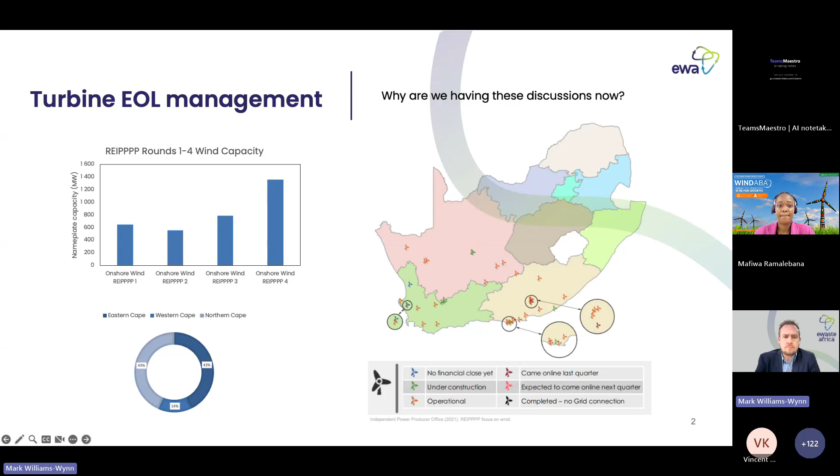The one thing I did want to focus on is PV. So PV, 5 years ago, everyone said, 'Oh, it's a future problem, we don't have to worry about it now.' And in 2023, we built a small plant just to start testing out how we can recycle these PV modules.

Within a few months, it was operating at full capacity. And I think in just this year alone, probably in South Africa, there's probably over 2,000 tons of solar panels that have been recycled. So that's how quickly the market builds up and the demand arises.

So I think this is why I'm very happy that this conversation is happening, just from a South African perspective in terms of protecting the environment, making sure that renewable energy stays as green as physically possible.

I think most people on this call would have more idea about the different components of a wind turbine than I do. So this is what you probably think about when you think about a wind turbine - these are the different components and different parts. From a recycler's perspective, this is what we would see.

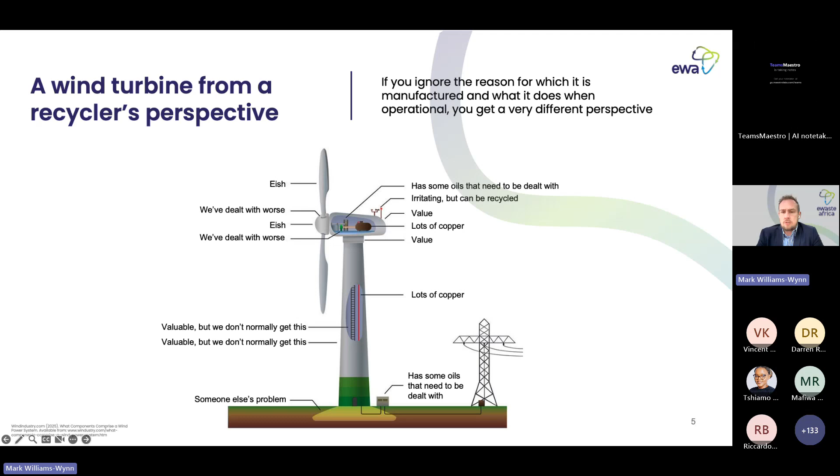What I want to focus on is, okay, well, what do we do with these wind turbines? So as I mentioned, the landfill of wind turbines is banned in South Africa.

So we have to find other solutions, and that's where your recycling comes into play, because by recycling, I'm actually referring to recycling and moving up on the waste hierarchy.

I'll show you what is meant by the waste hierarchy in the next slide. But it's finding ways to reuse the materials rather than just dumping them into landfill, where they will sit indefinitely, because they're not going to break down over a long period of time.

But if you look holistically at a wind turbine, and you look at what's called a life cycle analysis of a wind turbine, about 89% of the, okay, we're just focusing on the carbon footprint, not on all the other environmental impacts.

89% of the carbon footprint of a wind turbine is generated in the manufacturing process. There's a small amount in operations and maintenance and installation, but the vast majority is in the manufacturing process.

And so what that means is, if you are taking it and you're just disposing of it, you are essentially wasting all of that manufacturing impact that you've had on the environment. And so it's important to start looking at circular principles to intensify the use of the resources.

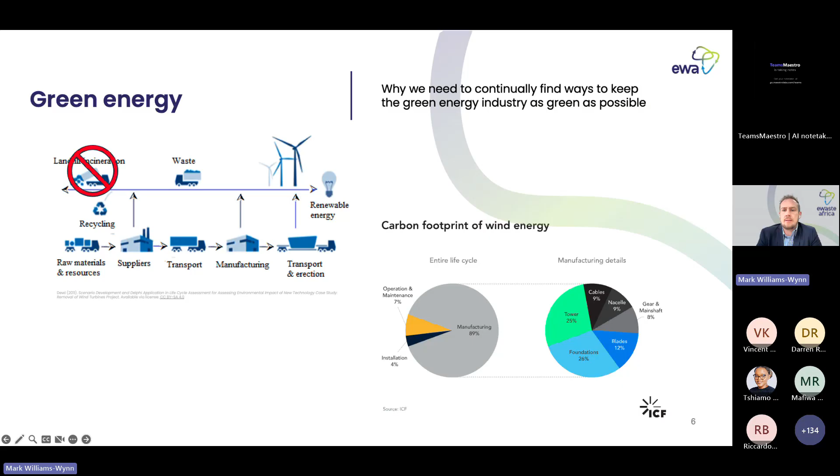Recycling is kind of undoing that manufacturing process, or to use a non-English word, unmanufacturing it, and all those inputs in terms of energy usage, chemicals, etc., are wasted because you have to redo it again for whatever you would reuse that material for.

So the waste hierarchy, it's actually a lot more complex, and there are a lot more levels than this. But I've simplified it in terms of what it could look like for wind turbine blades in South Africa.

So usually the lowest level of the waste hierarchy is disposal, but because it's banned from landfill in South Africa, the lowest level in South Africa would now be recovery of energy.

That is putting the wind turbine blades into some sort of pyrolysis or process where you can recover oils from the resins, or else using them in co-processing in cement kilns, etc.

But so the whole idea behind this waste hierarchy is the higher up you go, the more preferable it is.

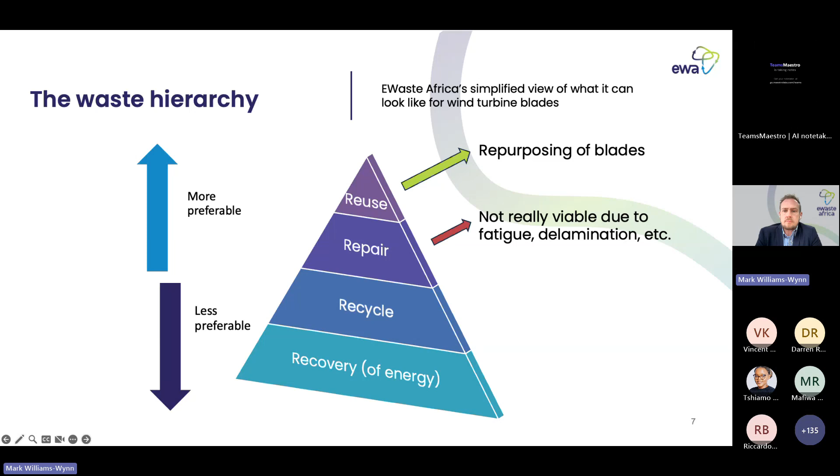If you're looking at using these blades and parts from wind turbines, the ideal way is reuse, where you're repurposing the blades for other aspects. I think BladeMade will take us through this in more detail later. Essentially, it's looking at things like using those blades for what's being done in Europe - bike shelters, bridges, kids' playgrounds, noise dampeners on highways, and protective sidings for highways.

I even saw recently there's a use of these wind turbine blades to stop desertification in China. I think South Africa is uniquely positioned for this, because sure, these are cool uses of wind turbine blades, but there's limited amounts that you can actually use them.

Whereas in South Africa, we've got a huge crisis in terms of housing for people. It's terrible seeing the number of shacks that are built every day, and there's an opportunity to make use of this material, which is going to have a lengthy time span. At the end of the day, it's mostly fiberglass, which can quite easily be repaired if there is a crack, in terms of using it for a roofing for a house or something like that.

Obviously, it can't be repaired as a wind turbine blade because of the intense forces that it endures when it is on the turbine. But in terms of using it to build houses, to build RDP houses, as a roofing structure, there's almost endless possibility in South Africa.

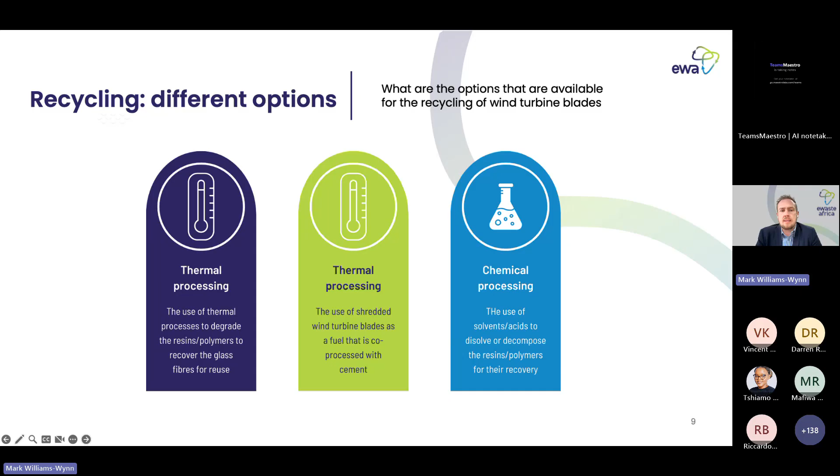And then the third option is chemical processing - using solvents or acids to dissolve and decompose the resins or the polymers so that they can be recovered, and also the glass fibers can sometimes be recovered.

For thermal processing, the first step is you need to shred the blade. So obviously, if you've got a 100-meter long blade, that has to be cut up into pieces, and hopefully that's something that DFFE can guide us on in terms of how we can cut them on site such that they can be transported more easily. Then they have to be cut down to a smaller size before they're shredded, and then moved into the pyrolysis unit. Pyrolysis is basically heating of the materials to a high temperature without the presence of oxygen.

If you add oxygen, it burns. But if you don't add oxygen, what happens is your polymers degrade and they form what is called pyrolysis oils. Those can be recovered and used either to fuel the process to provide that temperature to do the degradation, or else they can be sold as fuels elsewhere. So you have the pyrolysis oils come off the top of the process, and off the bottom of the process you get a char, and then sometimes you can recover those glass fibers.

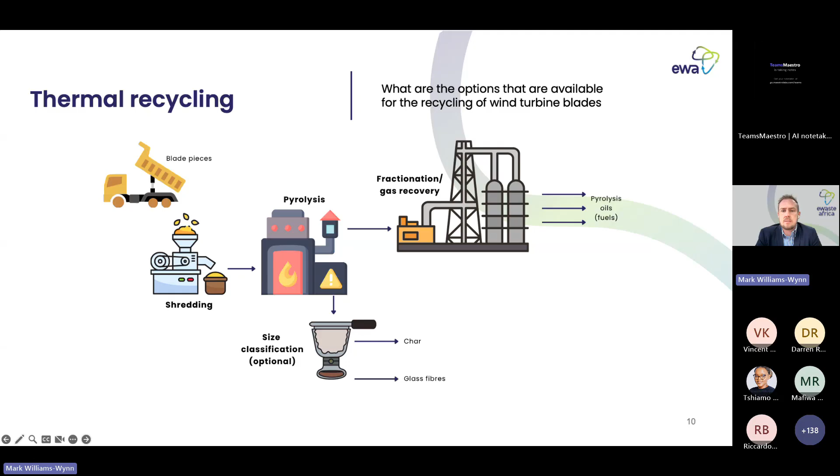Co-processing is very similar, but it just replaces the pyrolysis unit with a cement kiln. You do produce CO2 in that process, and then your cement clinker is where the glass fibers end up. Interestingly, Wind Europe has promoted this as the best solution for end-of-life management of wind turbine blades, because 100% of the material ends up in the cement. Since cement is used on a large scale and there are many cement kilns across the world, it's something that can be deployed immediately without needing specialized processes.

The last process is chemical processing, and the aim of this is to recover or separate your polymers from your glass fibers. Sometimes the glass fibers can be reused, but other times they can't, and a lot of it depends on how the blades are shredded and what the demands are for that glass. So maybe it can't be reused to make new wind turbine blades, but it could be used for other glass fiber products.

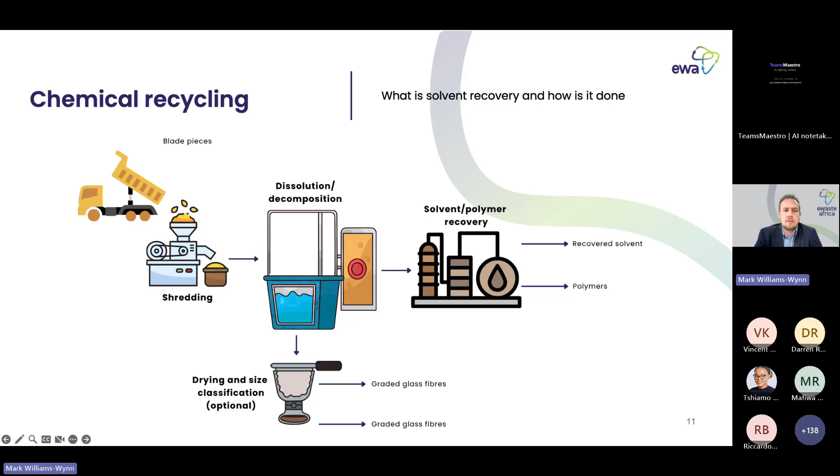In this dissolution or decomposition reactor, there are a number of processes internationally where either you add a solvent which dissolves the polymer, or you add an acid which breaks it down in a different manner. Then you have to go through a solvent recovery process, or some sort of recovery process, to recover that polymer and the solvent for reuse at a later point. You can also look at drying and size classification of the glass fibers if you want to reuse them in very specific applications.

So lastly, just some considerations I've mentioned already, but to reiterate: on-site processing in terms of cutting down the wind turbine blades to size. The big challenge with that is obviously the glass fibers—if you're cutting, you're releasing particles which could be carcinogenic, so it has to be carefully monitored and controlled. But from a waste management perspective, it doesn't make sense to transport these blades as large 100-meter-long abnormal loads when you can cut them into smaller sizes. This is something that may need changes to legislation slightly to enable that.

And I think another important aspect, particularly around EPR requirements, is clarity on the battery limits—what is considered e-waste, which are the hazardous components, et cetera. But I think there are great advantages with...

Considering the end of life of wind turbines, there is great potential for job creation. And then there's also, as I mentioned, the use of the blades for concepts such as RDP housing, which is immense in South Africa, and I think it's something we need to look at closely to see how we can align with government in terms of providing those roofs and materials for building RDP houses.

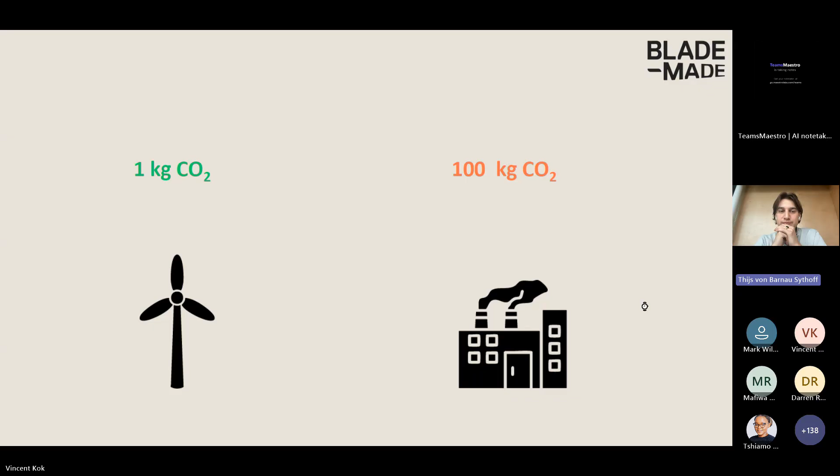But next slide please - at some point we've overlooked a few things. What we've overlooked is the material intensity. That was really nice, what Mark also illustrated - 87% of the CO2 comes from the manufacturing of the turbine. Because once it's there, it's very sustainable, but it's very high in material intensity. And we've never really thought about what to do with the turbines once they have to be decommissioned.

Please, next slide. So what are the metrics on this blade waste? Mark already explained a lot very nicely, the difference between the different components, so I'll just leave that be. So you now know that indeed blades are a pain point.

I've been presenting this slide for a while, and there's a few things interesting - one is 600 tons in 2025. I must say a lot of this is from a European perspective - we're a Dutch company, I'll come to that in a second. So a lot of it is on a European perspective, but I think it's really nice for you also from this South African perspective, where I believe, if I have the metrics right, most of your parks are now on half-life. So you actually have the time to avoid some issues that we in Europe have now.

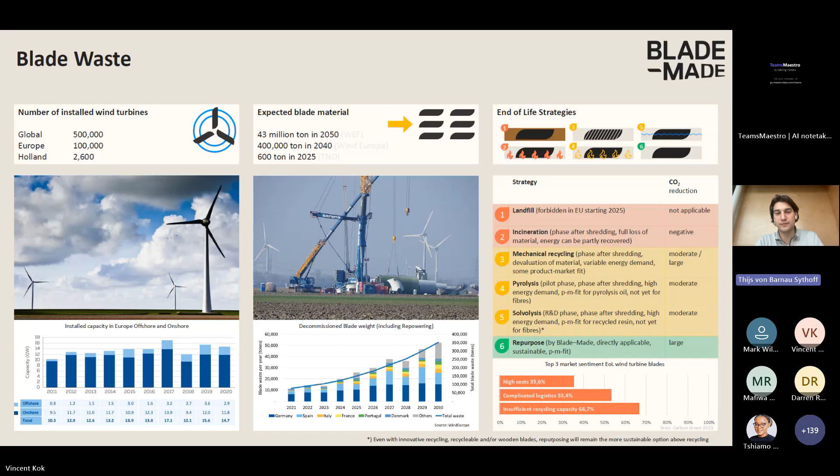Then another thing I'd like to talk about is circularity. I've visited a lot of events in the wind industry, like the Big Wind Europe fair, and also here in the Netherlands there's a lot of events where we talk about sustainability in the sector. And then I hear a lot the text: yes, circularity, but we're also already working on circularity.

We're working on, for example, recyclable blades, and that is a very good and very important development, but that's only preventing the problem in the future. We have a current problem that comes from blades that have been produced in a way that are not recyclable. Also, recyclable blades at the moment are only 27% recyclable - that's a good footnote. So just saying yes, we're already investing in circularity in our new products, does not mean the existing issue will just magically solve itself. It's not going to magically solve this 400,000 tons and 43 million tons that is projected at the moment. That is still coming.

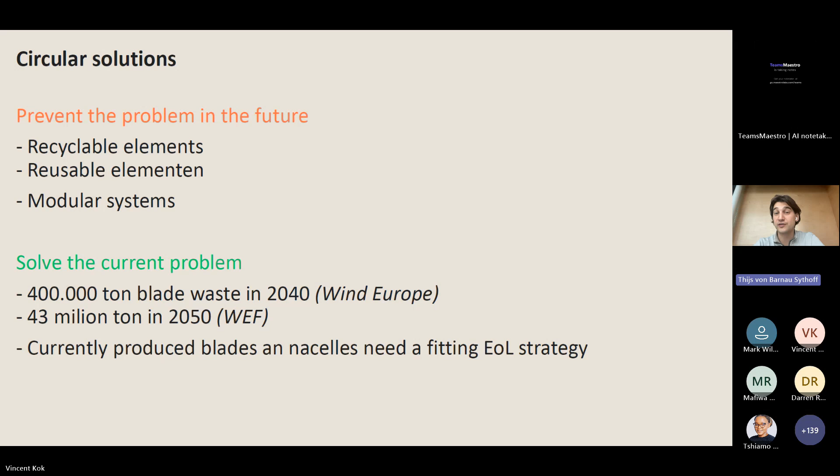So we need good end-of-life strategies for this. And if I talk about end-of-life strategies, I talk about reuse, repurpose, and recycle, and yes, in that specific order. Why in that specific order?

It's in Dutch, but the most important words are in English: the R ladder of circularity. It goes all the way from refuse to recover, and the higher you are in this hierarchy, the more circular and the better it is for the environment, and the more quality you have in reusing your materials.

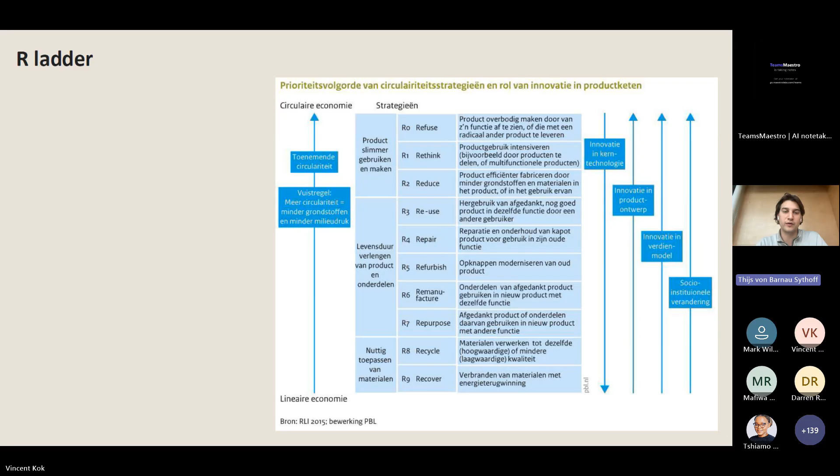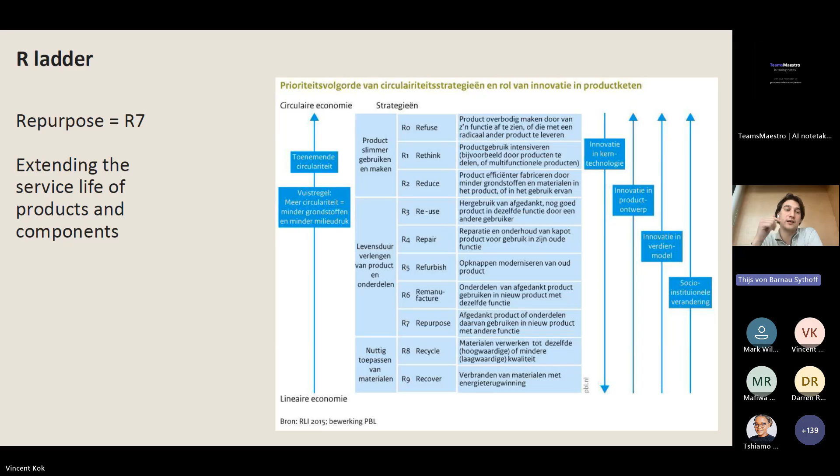So reuse, that's the first. Reuse is R3, and it's in the category of extending the service life of products and components. Repurpose is quite below that, as R7, but it's still in the category of extending service life of products and components. Recycling, although it's only one beneath repurposing, is a completely different category - it's just effective use of materials.

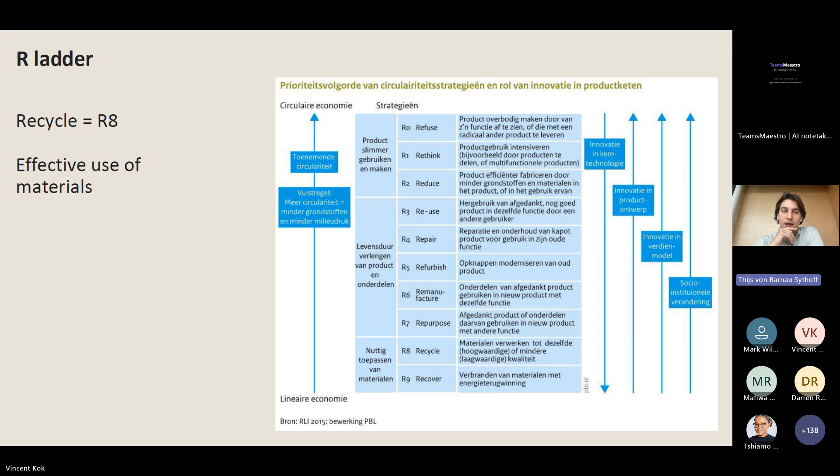So again: reuse, repurpose, recycle. Reuse is the best, but it just doesn't happen as much, because reusing a wind turbine blade literally just means it comes down from the turbine, you decide this is still good to go, and you sell it to another wind park owner, and it will have another 10 or 15 years being itself. It happens, it is the best option, but it's definitely not a solution for all our material right now, because a lot of the blades are just not capable of safely having this second life. Then comes repurpose, that's what we do, and then recycle, of which Mark has told you a lot about.

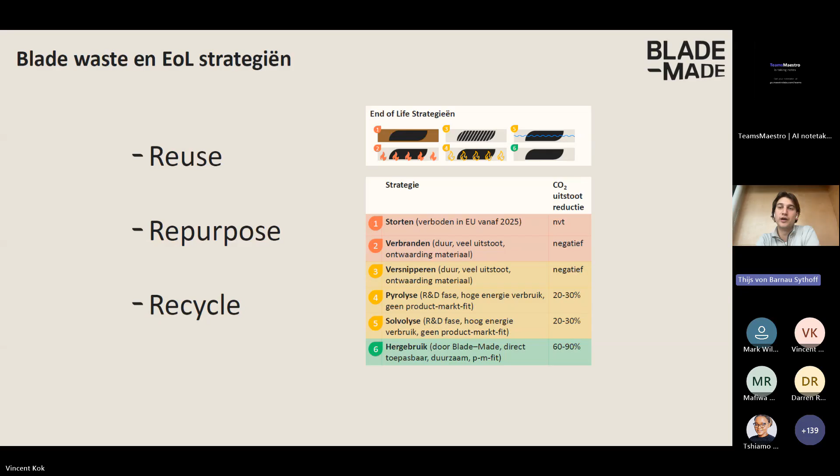So now let me introduce you to Blade-Made. We're a company in the Netherlands, and we believe in this repurposing strategy before recycling - so this is what we do. Our mission is impact, and we give this ever-growing material stream of wind turbine blades a second life as building material, with an internationally scalable, immediately applicable, and sustainable solution.

So again this metric, but now we're on both ends. We're all the way at the top, because if you use a wind turbine blade for something you would normally use steel or concrete, or any other material using virgin resources, then you don't have to use these virgin materials - so you actually refuse to use those materials. And then, from the wind sector perspective, the repurposing of the wind blade material is, well, repurposing. Makes sense.

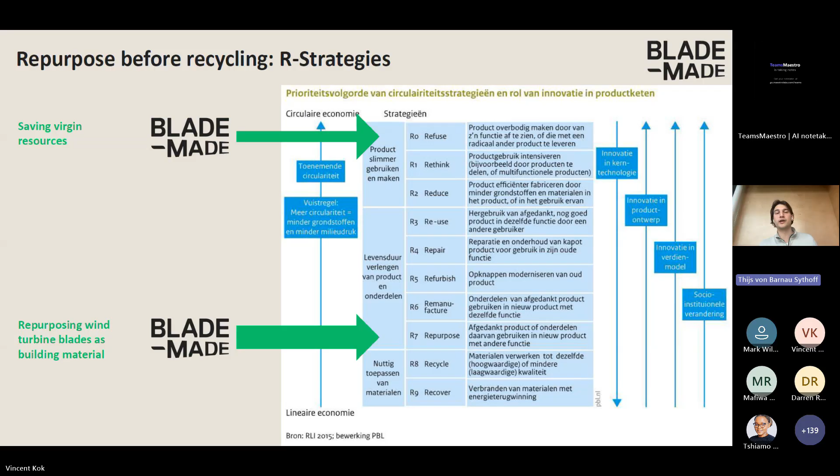So what do we then do with it? Well, again, we use it for urban furniture, we use it for playground equipment, we do custom designs and artworks, and we're recently moving into infrastructure with noise barriers, bridges, and also facade panels that I'll talk about. That is our part of scaling up.

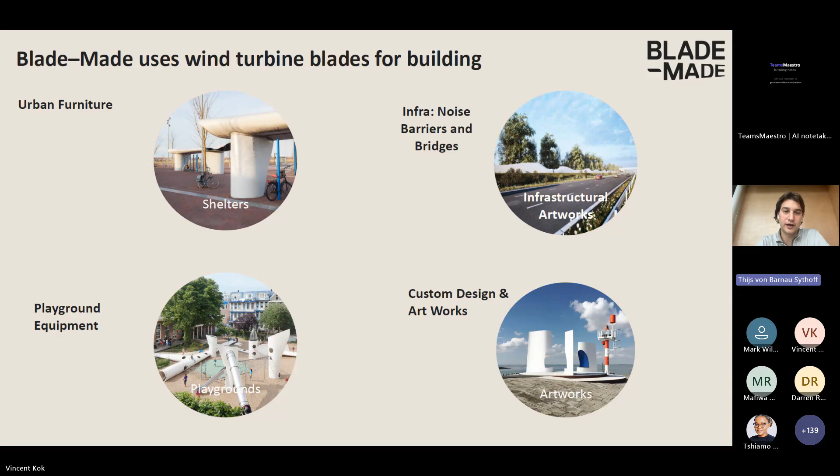So where do we come from? This is the Wikado playground here in Rotterdam. Rotterdam is the second largest city here in the Netherlands. It's still there - it's quite old already, from 2008. So this was long before the discussion on end-of-life issues for wind parks was really the case.

This started off with a completely different perspective. It was the design idea of trying to minimize virgin materials for anything we build. We found blades in the backyard of a farmer and said, hey, can we use those? We sawed them up and made a nice playground out of it. It was only later when we noticed it was a real issue that we shifted. That's another instance of a nice playground.

Then we moved into urban furniture. We experimented a lot with making benches and urban configurations. The one on the left, our boulder blade, is something that still catches a lot of attention. It does a sort of roadshow through the Netherlands, and a lot of institutions are very willing to have it in front of their museum, for example, for a couple of weeks.

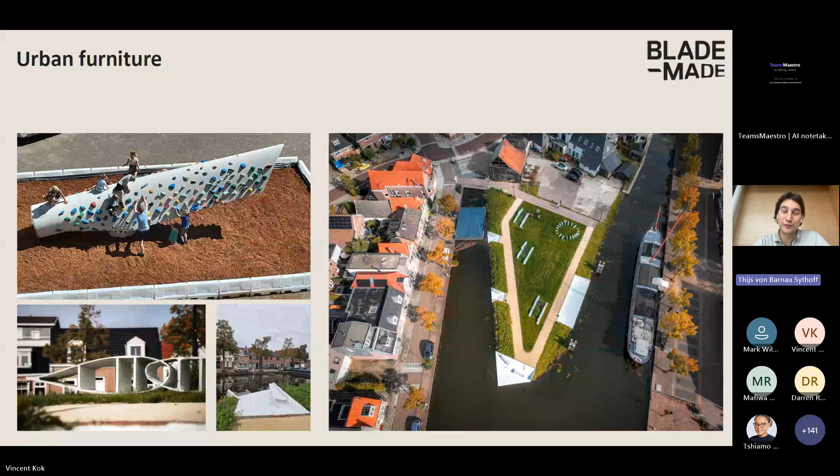But as said, our mission is impact, and with 43 million tons of blade waste, you're going to have to make a lot of playgrounds and benches if you want to repurpose that with these strategies. So we're moving towards scalability. Next slide—another instance of a nice bench.

Scalability. We're at the moment on the verge of 3 projects, of which I can tell you about 2. This is our pilot for a noise barrier along the highway of the A58 in the Netherlands. This exact picture I already saw on Mark's slides. But on the 2nd of July, we actually opened a physical test barrier.

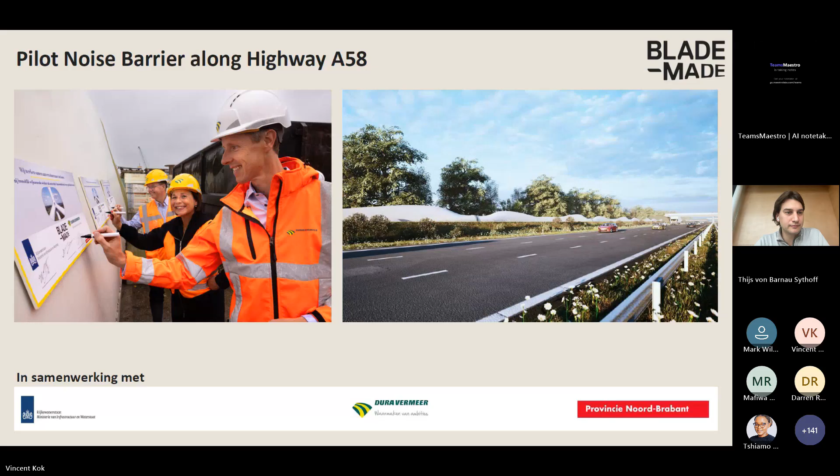There it is. So we've built 60 meters and we're testing it now on—we've already tested it on sound quality, the soundproofing, the actual quality of the soundproofing. Because it's very nice that it's sustainable and it looks cool, but it also has to do its job, of course.

The full life cycle analysis, the financial picture of it—this December we'll have it ready to market. Then we'll start implementing it first in the Netherlands and hopefully quickly also in Europe. It looks very promising. It's one of our cooler projects, I must say, also because of the scalability and impact.

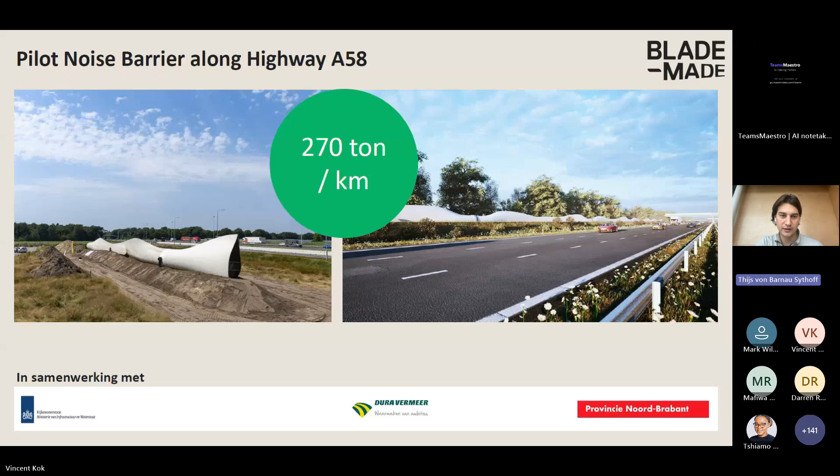By doing this, we actually repurpose 270 tons of blade material for every kilometer you build with this sound barrier. So that's starting to get effective. We're also in the process of building this beautiful building here. In it, we'll repurpose 160 25-meter blades that will come down from a park here in the Netherlands, the first really large-scale onshore park to be decommissioned here.

Well, I don't have the right metric ready, so I'll rather not say, but at least it's 160 blades, and that will result in 320 tons of blade material. And as said, right now in Europe, we have 600 tons in the year 2025.

So when this project and the other project are finished and realized, we will have actually already solved almost all of the blade waste for this year in Europe. That's also proving that with some smart design thinking, you could actually make a lot more impact than you'd think at first.

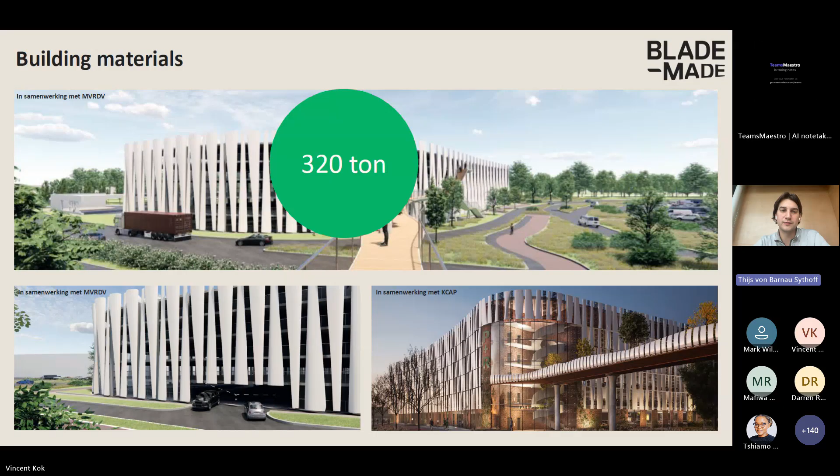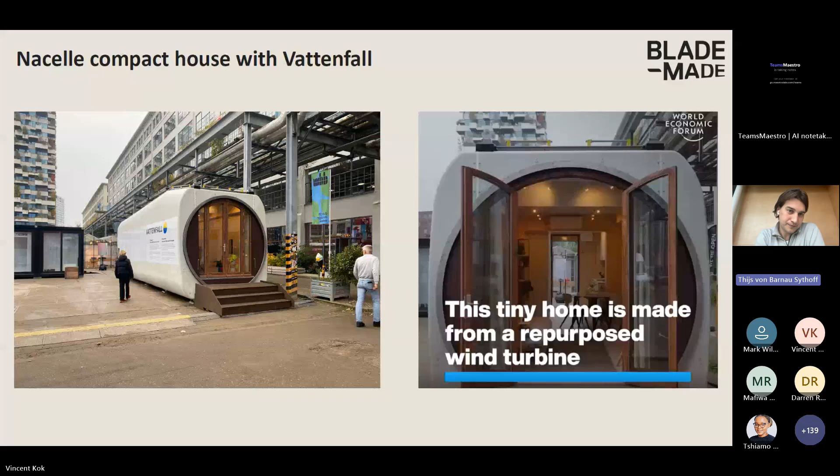Then how do we work? We work with a circular chain, and our idea—this is a nice moment to clarify—is that repurposing is not the end strategy, because our material also needs to have an end of life.

A sound barrier also reaches an end of life phase, and then you still have this same glass fiber reinforced polymer, very hard to recycle stuff. But once we've placed it with high value in the public space, it's not waste that only costs a lot of money, but it actually has value and economic value, but also functional value in the public space. Then we can give the recycling industry time to develop. And after 30 years, you betcha, with all the money going that way, they'll have proper techniques to actually recycle properly with high quality of end material.

So we take the blades, it goes to our storage and transformation facility. Then we actually place this material in the public space. So you could say it's sort of a functional landfill almost. And when it has reached the end, we'll see, well, maybe it can reloop again from a sound barrier. It can become something smaller, up to the point where the material is really at its end of life. And then it can go to a recycling facility, and maybe by then it's even possible to repurpose the material for new blades, because that's also a large issue.

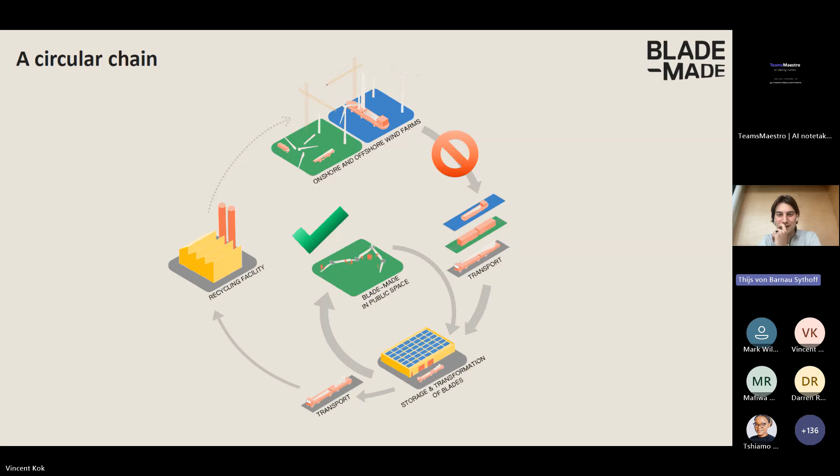The wind energy sector is very happy to supply us with material. They even say, oh, I can contribute to this project by giving you my blades for free. But we all know, your blades aren't free, it costs you money. So if you give, then you actually don't pay for something that you would pay for normally. But yes, we like the blades, but we also really need transparency, collaboration, and we need investments.

So next slide, please. Why would you invest in end-of-life strategies? Well, I can understand very well why not in the first instance. What's the issue? I mean, at first, when the first parks were built, no one took into account financial budgets for sustainable decommissioning of these parks.

So it has to be paid for now. And so the wind park owners, they have a huge bill on their table to sanitize their parks. And usually, especially in the Netherlands, this sanitation is also mandatory. It needs to go, and you now need to pay. So then it's not that strange that for wind park owners, they say, okay, it just needs to go as quickly and as cheaply as possible.

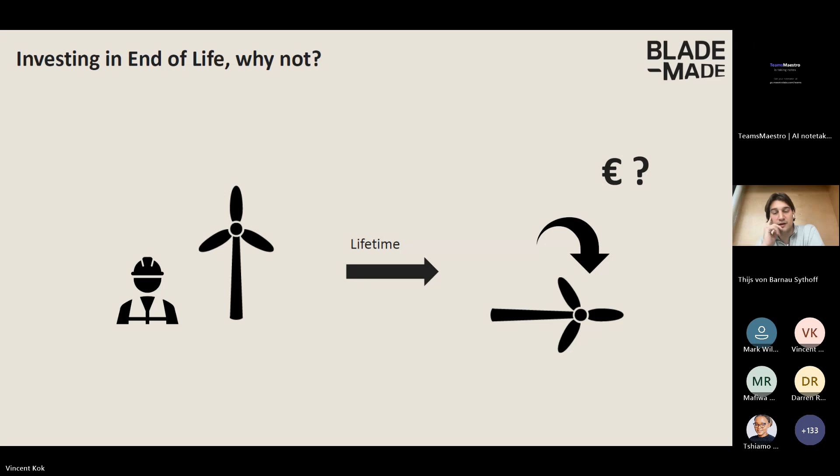Please, next slide. And well, it's not only from a whole turbine that it's well recyclable, but that also means that it has value because it is a resource. The blades and the nacelles, all the glass fiber, as the way it works now, it has a negative value. I mean, for us as well, we get paid to get the material. There's a gate fee. That's the market, because it is waste.

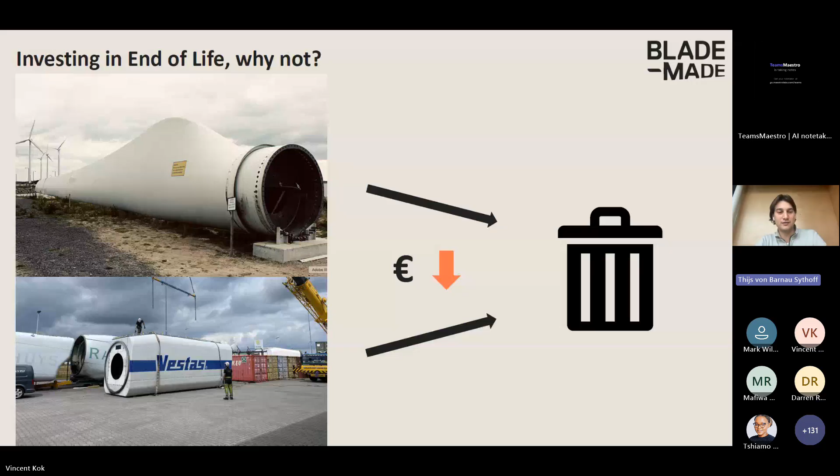But why is it waste? Because we don't see it as waste. Next slide, please. From a Blade-Made perspective, it's not waste, it's a resource, and a resource logically has value. We don't see this as a very hard to recycle, immovable object. We say, wow, I see a 1/15th part of a sound barrier. Same goes for the nacelle, I see affordable housing, I see the chance to solve housing issues. So that automatically gives this material value.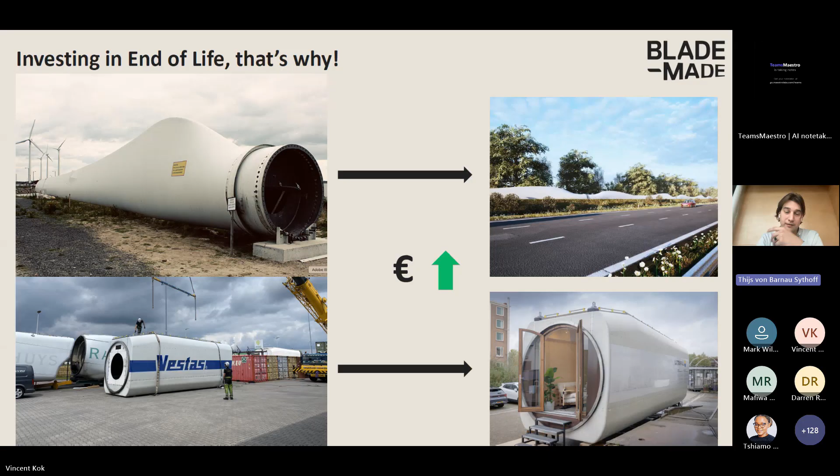Well, at the moment, we need this gate fee at the beginning of our process, because otherwise we cannot make a product out of it that is then sellable at a reasonable price on the other market. That's because we have very high production costs, because everything is very experimental, one-off. In other words, we're not at a scale yet where we can make the production affordable or more affordable. And that is because there's a lack of collaboration and investment from the wind energy side.

If we would make huge collaborations where we can go from project to project to actually plan treatment of this material—and then I don't only mean us as Blade-Made, I mean the repurposing strategy, and any company that does something with repurposing strategy—it's about investing in that broader vision. Because if you flip that reasoning around, if there is money, then we can scale up, and then we can actually make the production a lot cheaper. And that means that we could then, in the end, actually maybe even pay for the material.

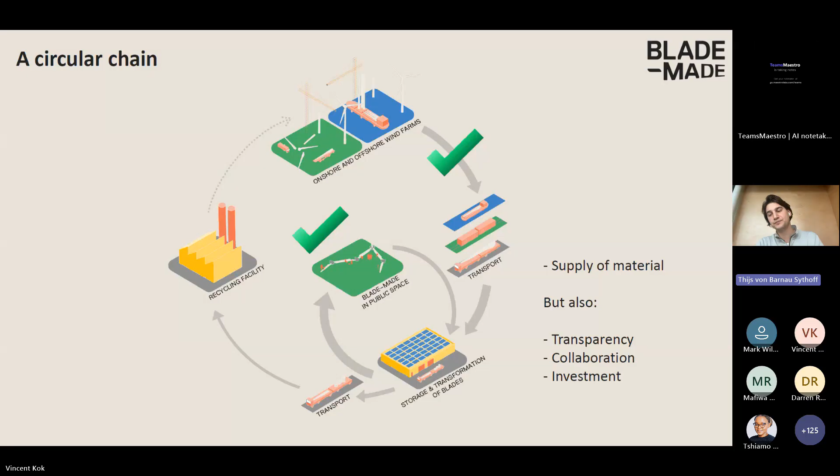And then that way, wind park owners and the whole sector can actually profit from their blade materials and nacelles, because it's no longer very expensive waste to get rid of, but it's a resource. Next, please.

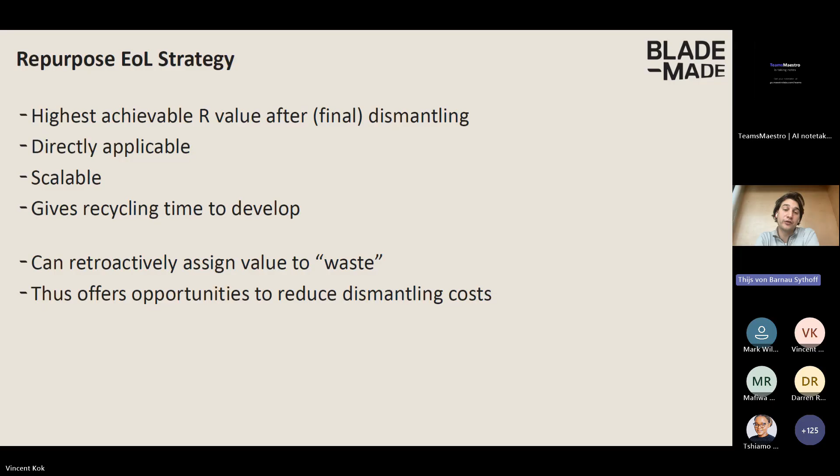So the repurposing end-of-life strategy, it is the highest achievable R value after final dismantling. It is also directly applicable. It is scalable, and it gives recycling time to develop, and it can retroactively assign value to things that we now count as waste. And this would, in the future, offer opportunities to further reduce dismantling costs.

So we need each other: acknowledge the problem, be transparent, work together, invest, and then you can reap the benefits. And I'd like to finish with the fact that you're already doing this, this seminar, this webinar, that you're well on your way. And well, it would be beautiful if you guys are capable of avoiding the issues we have now in Europe, because you're earlier thinking about the right solutions and preparing the right strategies. That was it. Thank you very much.